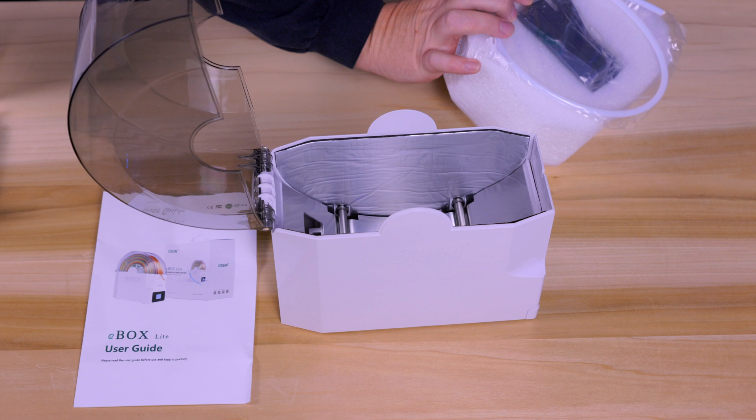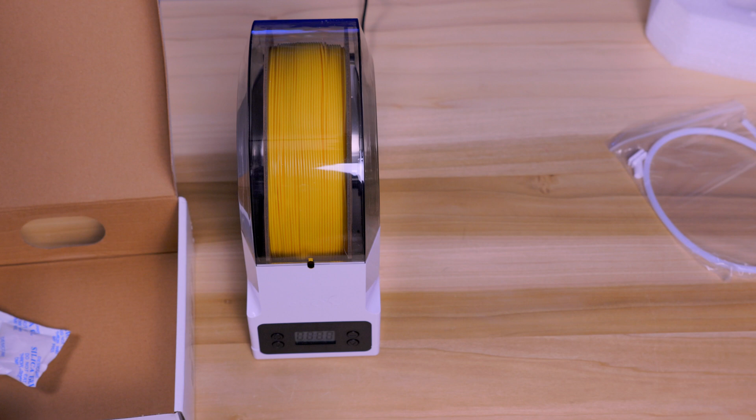All right, so now let's get our filament unboxed. And on the manual online, it says that setting number 2 is for PETG. So we'll do that. You'll notice this only has 3 settings on the temperature here. We'll put it on number 2. And I'll see you when it gets done drying.

All right, so as that filament is drying, let's take a look at the website here. And here is the website for the PETG high speed here from eSun. Under parameter information, it says to dry it for more than 3 hours. So I put it on the PETG setting for the eBox Lite and dried it for a little over 3 hours. You'll see they have a bunch of colors on here, and they are having a sale for the holidays right now. So if you're watching this when the video comes out, they are having a sale.

And then this is the eBox Lite that I have here. It shows all of the different materials that it'll dry as well, which I think is pretty cool. It uses less energy than your Bambu would. If you don't have an enclosed printer and need to dry something like TPU, you'll be able to do that with this. They also have a larger one as well, this eBox. That gets to some higher temperatures and probably does stuff a little bit faster. It looks like you can keep the filament in here and then print from it. I won't be doing that, I'll only be using this to dry the filament.

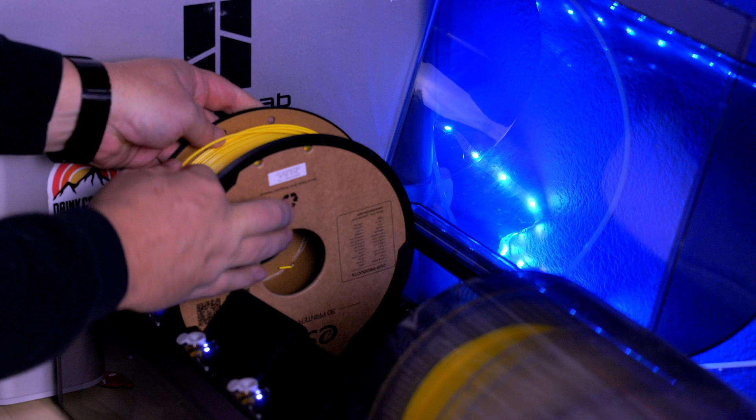All right, so here we are in Orca Slicer, and as you can see, we have the PETG loaded in the first slot of the AMS there. So we'll go ahead and start with the temperature test. We'll click on temperature, make sure to click on PETG, hit OK. That's going to set up our model. We'll go ahead and slice it. It's going to take about 46 minutes, so we'll print that, and I'll see you when it gets done.

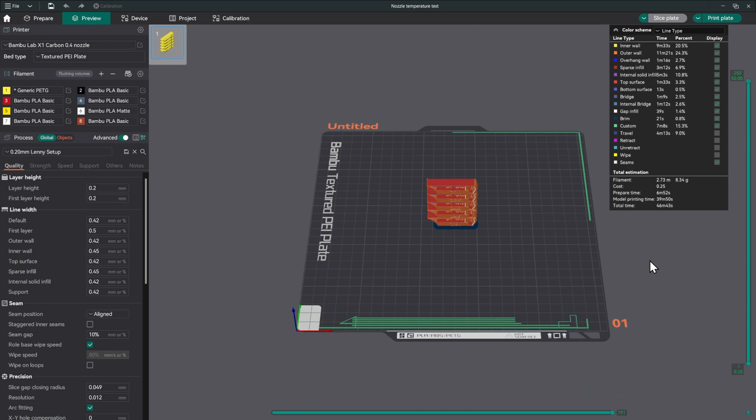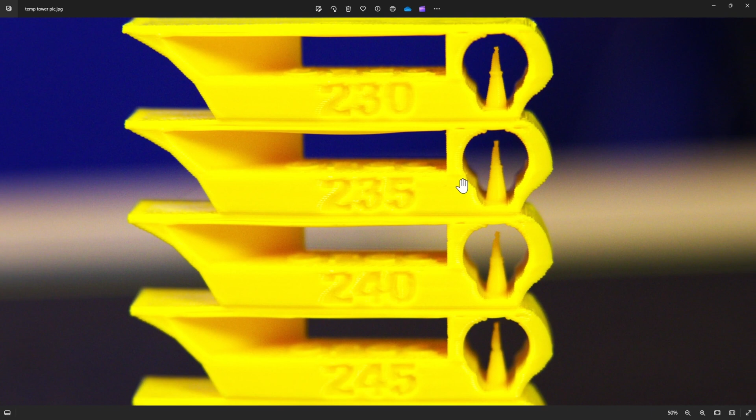All right, so here is a picture of the temp tower, and I will say between the 230 and the 235, I think I'm going to go with the 235, looks the best out of them all. I took several pictures of it, zooming in and out and looking at everything there. This one seems to be the one with the least defects, so we'll go with 235.

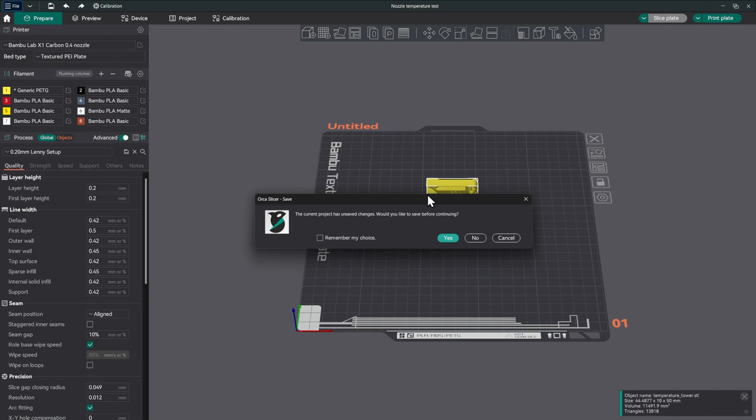So let's jump into Orca Slicer. What we'll want to do now is go to new project to get rid of all the settings and everything that are in there. And we don't want to save it, discard. So now we'll go into our filament here, and it shows standard at 230 or 255 here. And I thought that the 235 worked the best there. So now we will save this, and we'll save it as eSun high speed PETG.

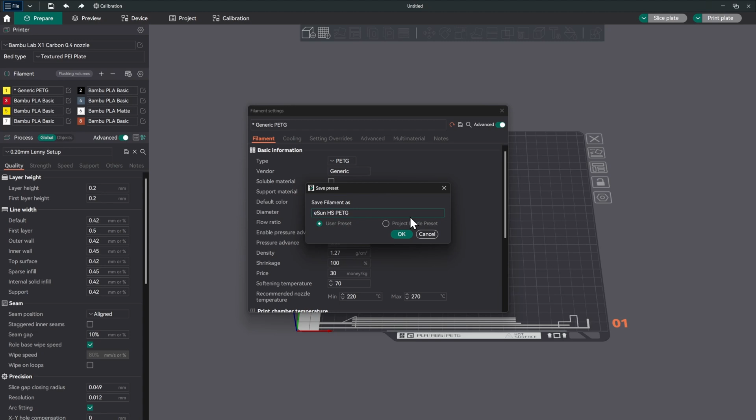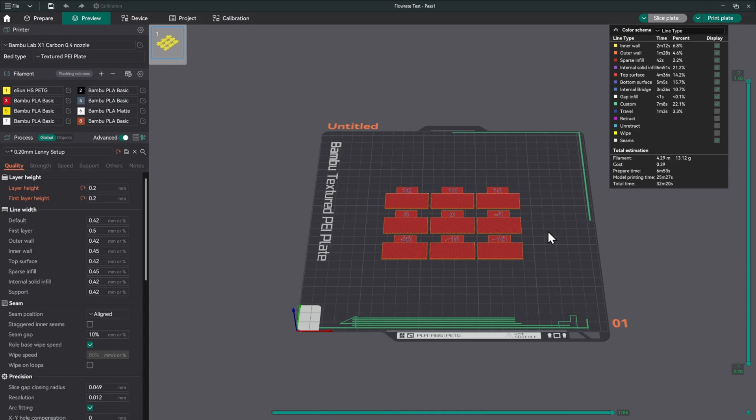All right, now that we have everything cleared out, we have that saved, we have our filament saved up here. Let's go to the next calibration, which is going to be the flow rate. We'll set up the first pass, which is these little tabs here, and get that sliced. If you remember what these tabs do, this is the flow rate at 0, so what it's at right now, and it does a bunch above, more flow and less flow, minus 20 and plus 20 in between, and we're going to find out which one is the best pattern. Really, after this prints, the trick here is to take a picture of it again and be able to zoom in. This takes about 30 minutes, so let's get it printed out, and I'll see you when it gets done.

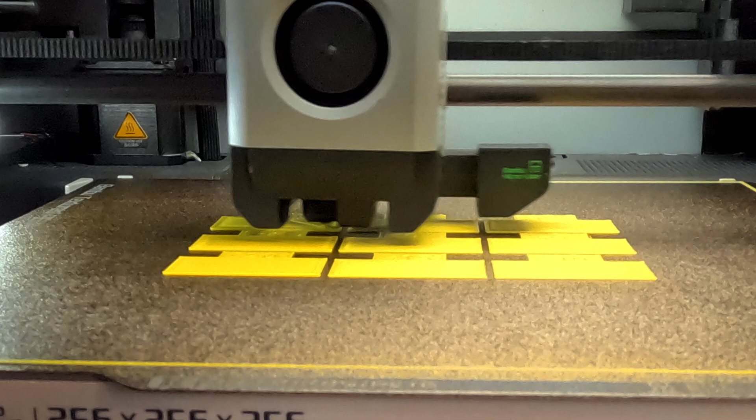So here we are with the picture of the flow rate, and as we can see on the over and on the under, pretty easy to see the -5. You can see a lot of ridges there. The 0 and the 5 look about the same.

And if you remember from previous things, always go with the higher one. So let's go ahead and open up Orca Slicer and go to the wiki so we can do the math for 5 as the modifier here.

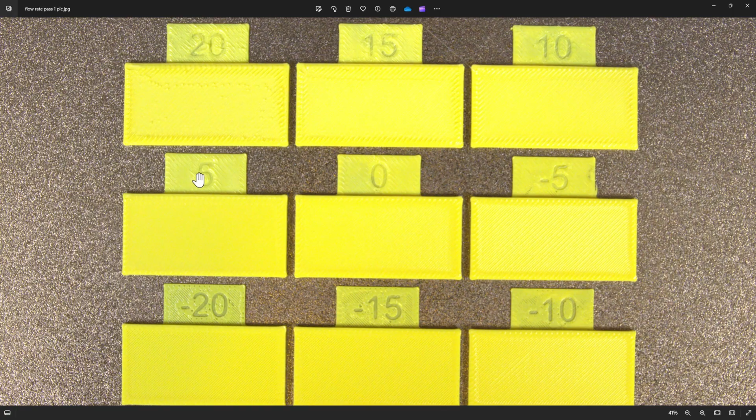All right, back in Orca Slicer, the first value that we need is what our old flow rate is, which is 0.95. So we'll want to write that down. Let's go to the calibration and go to the tutorial.

And here we'll see the math for the flow rate. Our old modifier was 0.95. We need to multiply that by 100 plus our modifier, which is 105. So 0.95 times 105 equals 99.75, divided by 100 is 0.9975. So that's what we need to change our flow rate to, and then perform the second test.

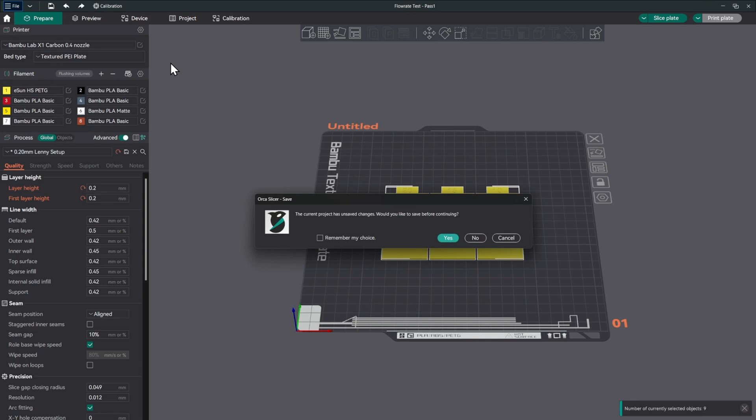So let's go back into Orca, and right here under flow ratio, we'll want to change that to 0.9975. And we're going to go ahead and hit the save button and save that. We're going to go to new project, don't save, discard everything.

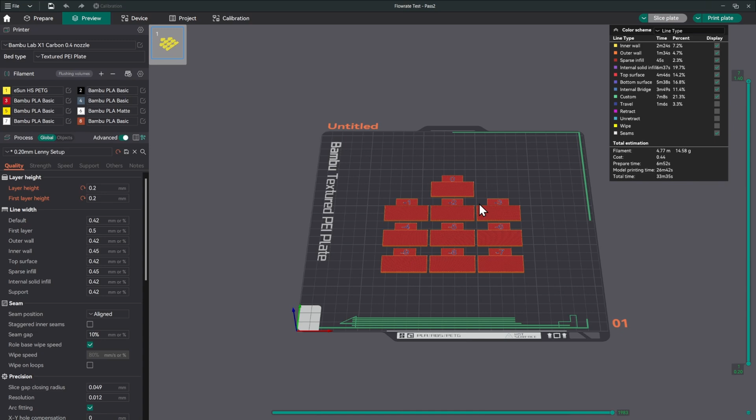And now we'll do the second pass of the flow rate test. This will fine tune it the rest of the way, and we'll need to do that math one more time. So let's go ahead and slice the plate. This one takes about 35 minutes, 33 and change, and same thing on this one. We'll want to take a picture of this and figure out which one of these looks the best. So I'll go ahead and get that printed out, and I'll see you when it gets done.

All right, so here we are back on the flow rate second pass, and this yellow color is a little bit harder to see, but you can see the separation between all of these with the -1 to me, and I did the feel test as well, but the -1 feels the best to me.

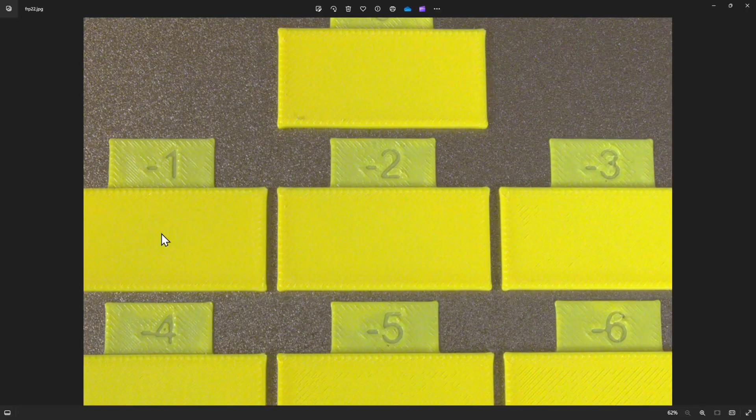So let's put that back into the math and get that calibrated. All right, so back in Orca Slicer, our starting value now is going to be the 0.9975. We'll exit out of there, go to the tutorial.

0.9975 times 100 plus our modifier, and our modifier is -1. So 100 minus 1 is 99. So 0.9975 times 99 is 98.7525, divided by 100 is 0.987525. We'll only go out 4 places, so 0.9875 is what my calculator says.

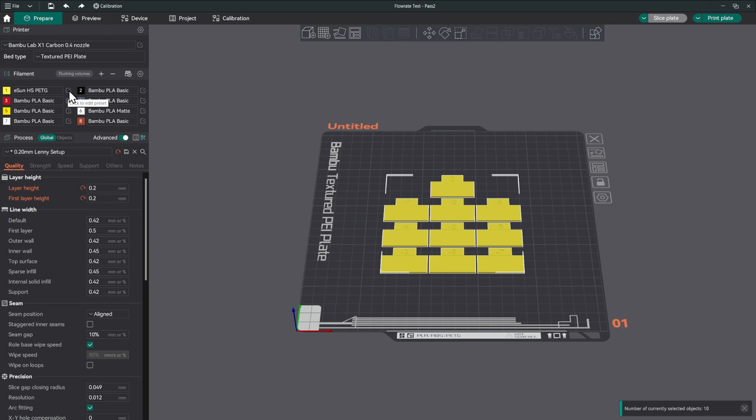So let's go back into Orca Slicer and put that in. We'll go back into the filament here, and basically it's just 0.9875. We're going to want to save that.

So we've adjusted the temperature, we've adjusted the flow rate. The next thing that we're going to need to do is the pressure advance. We'll go ahead and save that with pressure advance enabled.

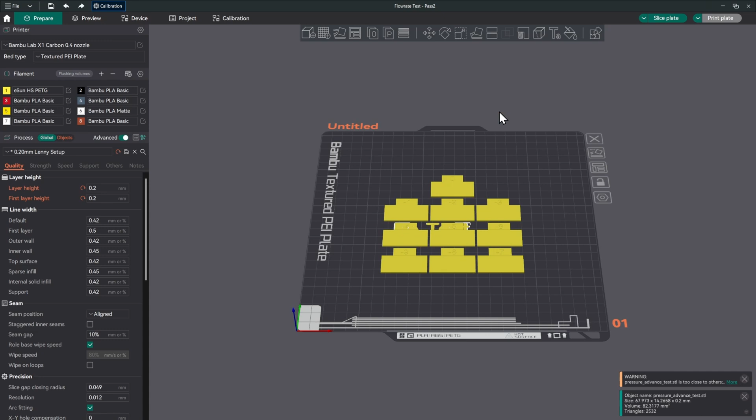All right, so now that we have everything saved in here, let's go ahead and exit out of there. Let's go ahead and hit new project. We don't want to save anything, we want to discard all of the options there. As you can see, when we go back into our filament, everything is the same. We have our pressure advance done.

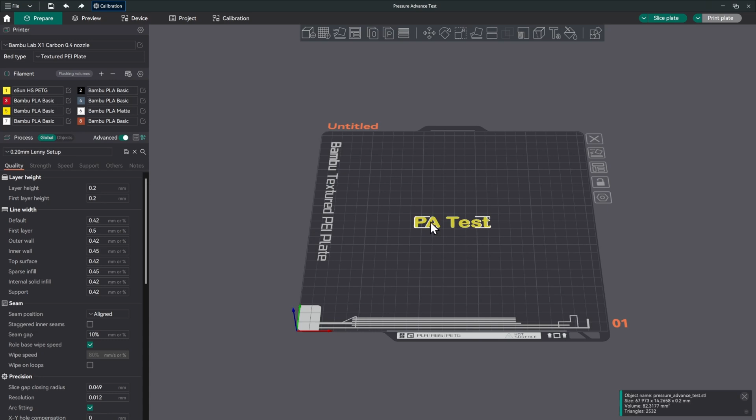So now we'll go ahead and do the pressure advance test, and we'll want to do the line test. We'll do that. You'll see that it shows up like that until we hit OK, or until we hit the slice plate. And this only takes about 13-14 minutes. So we'll go ahead and get this printed, and I'll see you when it gets done.

All right, and here is the line test, and you'll see that they put a background against these numbers. I used to always have a problem with these numbers peeling off right here. So this is really, really cool. What I look for on this test is you'll see there's kind of a pattern on the left and the right, and I see where that kind of ends, and then I look for the line that looks the best and the straightest, right here.

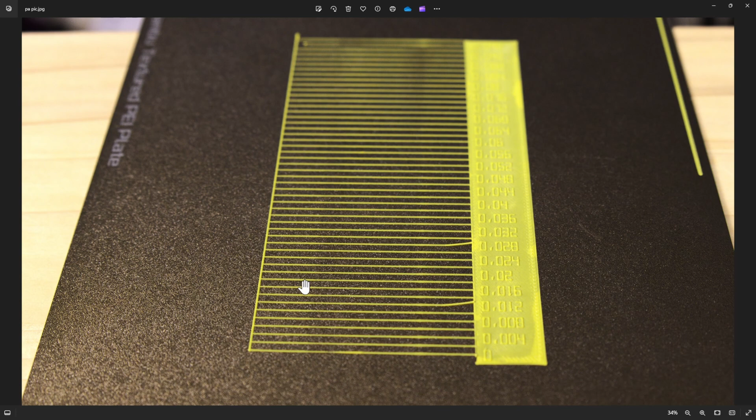And I took several pictures of this, but this is the best one for where we want to calibrate it to, and really that 0.024 really looks the best to me.

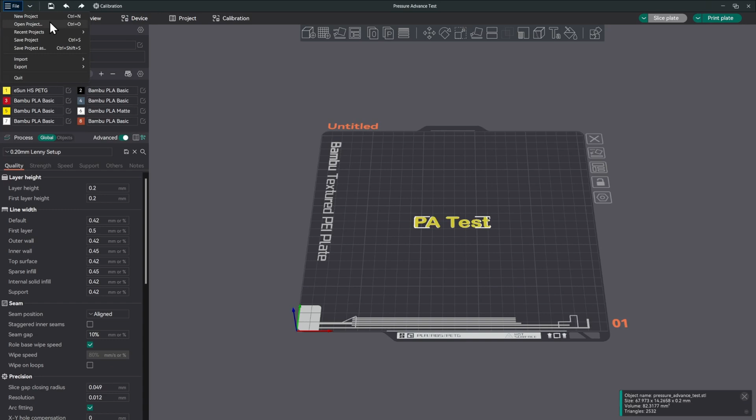So let's go into Orca, and we'll change the pressure advance to 0.024. All right, so here we are in Orca. Let's go ahead and hit new project. No. And then now let's go into here and change our pressure advance to 0.024. And we'll go ahead and hit the save button there. Then we'll move on to the next calibration.

That last test will be the max volumetric speed test. Now, with this test, I probably won't ever put a filament over 20 millimeters cubed per second. If you look at my ludicrous video, what I found out is this really only affects when you're doing really long prints in ludicrous mode. Otherwise, the filament can handle all of the settings. I've never really seen it do this, but we'll try to push it to its limits. I've only seen birds nesting or whatever happen when you're doing really long prints at the ludicrous speed.

So let's go ahead and do the max volumetric speed test. That's under max flow rate, max volumetric speed test. The start volumetric speed is 5 and the end is 20, which I think it can handle. Right now it's set at 7.5, so it can handle that. I normally run most of my filaments at 15 just because I found that comfortable, but let's see if we can push this one over the top today.

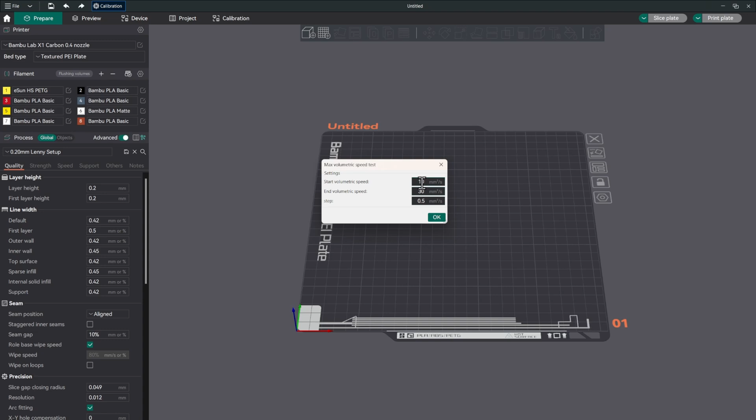So what we'll start it at is 10, and we'll end it at 30, and we'll do increments of 0.5. So it'll be a little bit more of a test than before, but we're not starting at as low a speed. We'll go ahead and hit OK.

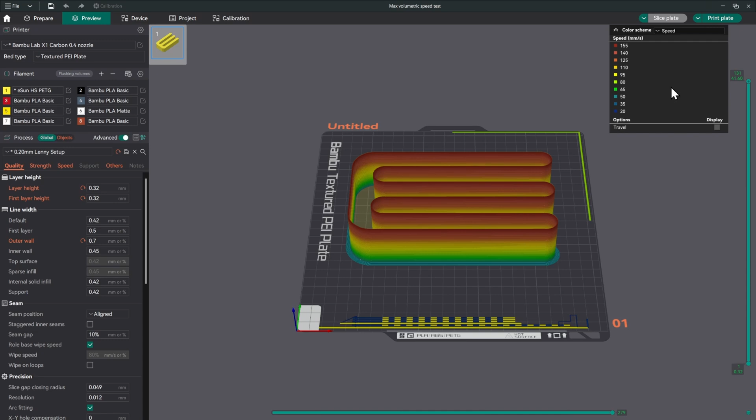We'll see that it gives us this pattern here, and when we slice it, the thing you want to look at is the speed right here, where it shows all of the different speeds it's going to travel. We'll put it back to line type. This test takes about 37 minutes, so we'll run it and see if we can get it to fail above 20.

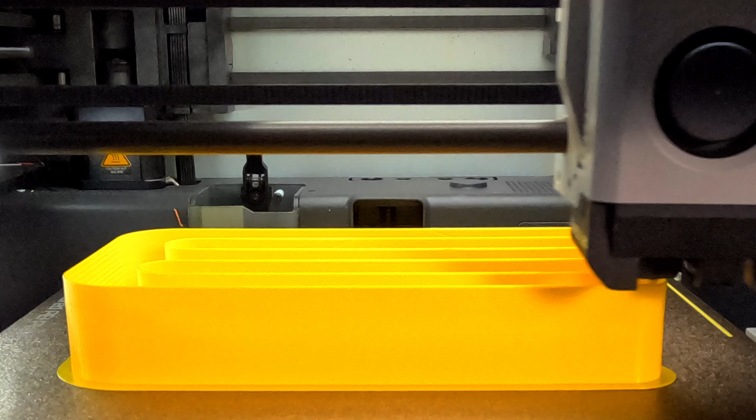All right, as you can see in the video and the picture here, right at the very end it did start to fail, but it handled business all the way up. I'd say 20 is probably right around in this area, and that's where it started to separate, and that would be the max I'd say it could do. So that's what we're going to set it at. I've never really set it past 20, and I'm glad I did because it did finally fail, but it was up above 20.

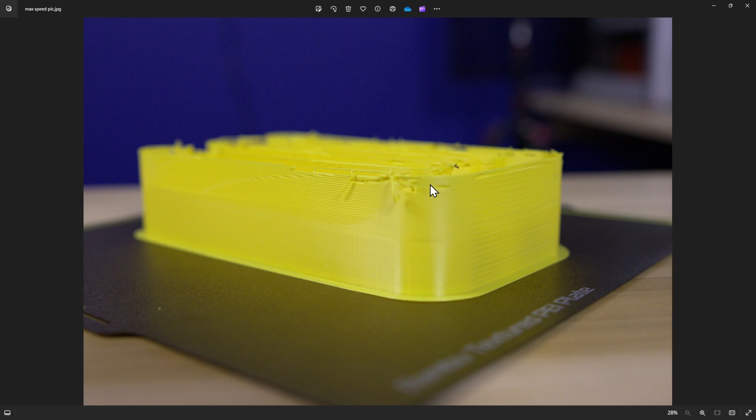So let's go back in Orca Slicer and change the max volumetric speed. Let's get rid of everything by hitting new project, don't save, discard everything. Then we'll go back into here, and at the very bottom, oh, I guess it was at 12, not 7.5. Some of them are even lower, but it was already set at 12. Let's set it to 20 and go ahead and save that.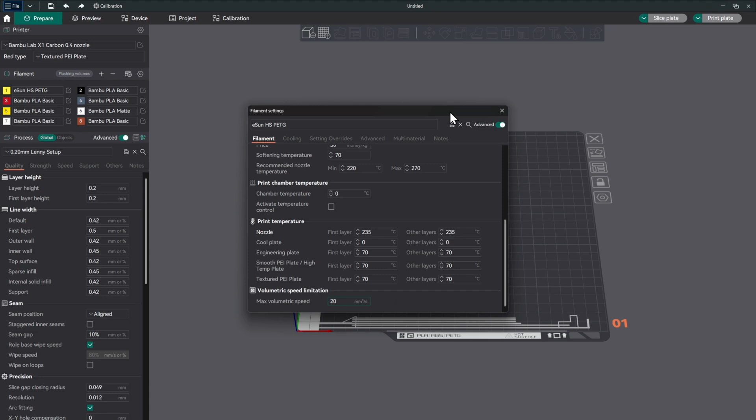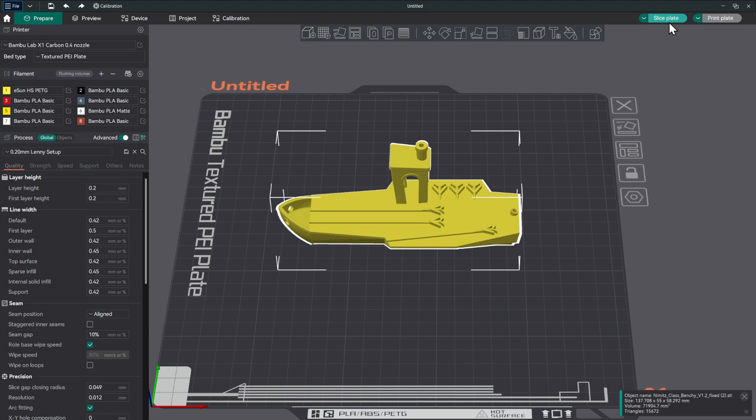Now that we have all the calibrations done, it's time for the benchy. Let me get the benchy loaded and we'll get it printed. All right, there we have the benchy. We'll go ahead and slice it. We'll see 1 hour and 7 minutes, and that max volumetric speed does have an effect.

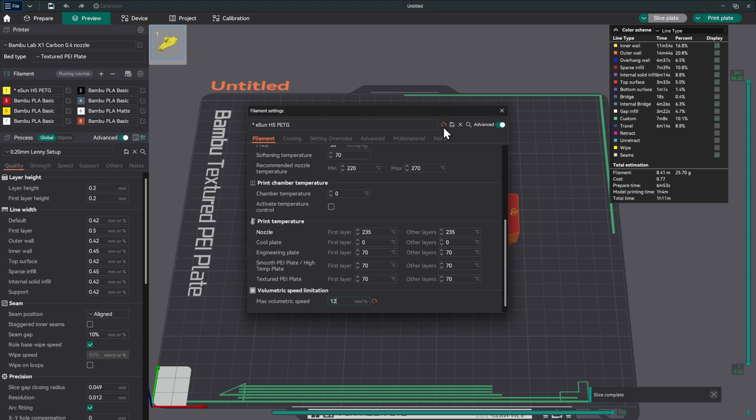If we put it back to the 12 it was at before and slice the plate, you'll see that it adds 4 minutes to the total print time, per hour. So if you have a really long print, 4 minutes every hour is pretty significant. Trick here: if you don't want to go back and change it, hit save and do all of that, we can just hit this revert button and it'll put it back to 20. Let's go ahead and reslice it, 1 hour and 7 minutes. So let's get this printed.

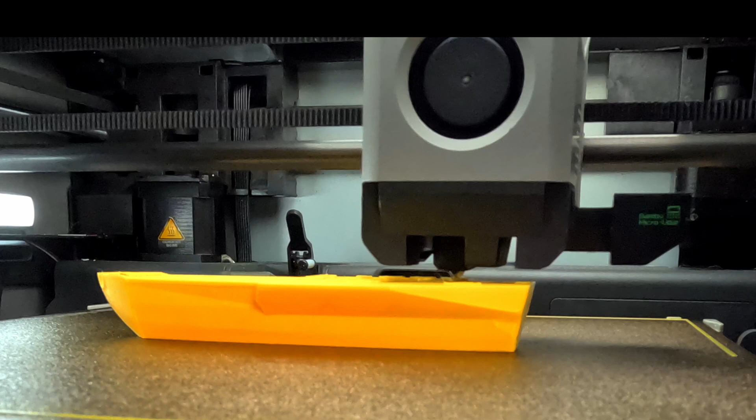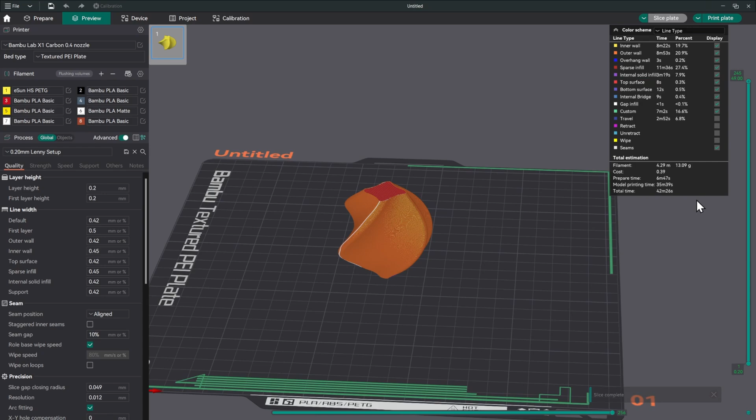All right, now that the benchy is done, we'll go ahead and get the sample in there, and we'll hit slice plate. This will take a little over 40 minutes, and I'll see you when it gets done.

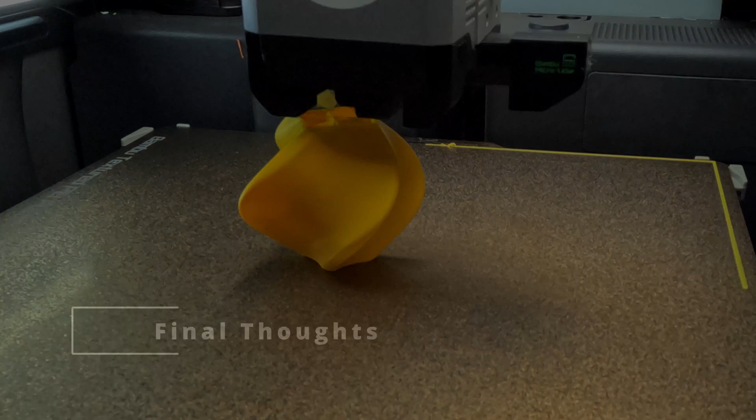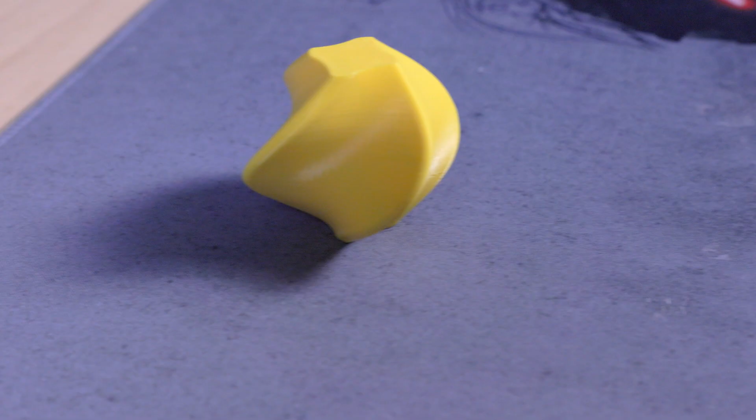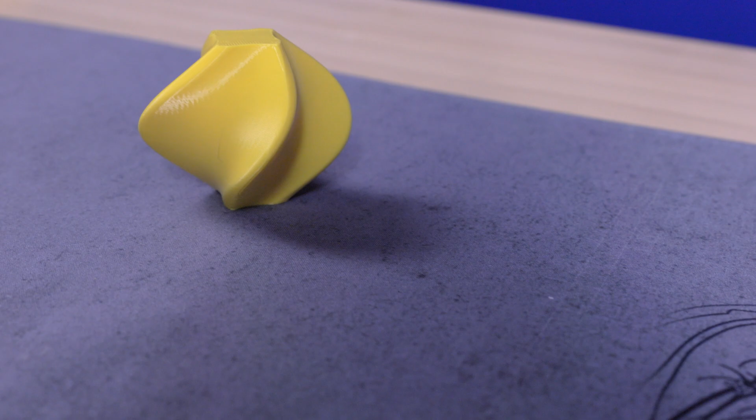I haven't done very much with PETG up to this point. Mostly everything's been carbon fiber, PLA, and here lately lots of ABS and ASA. So I haven't done a whole lot of PETG, so it was kind of cool to do a PETG filament tuning today, or calibration. That was kind of cool, and it was just as easy to calibrate as anything else, and the results, as you can see, are perfect.